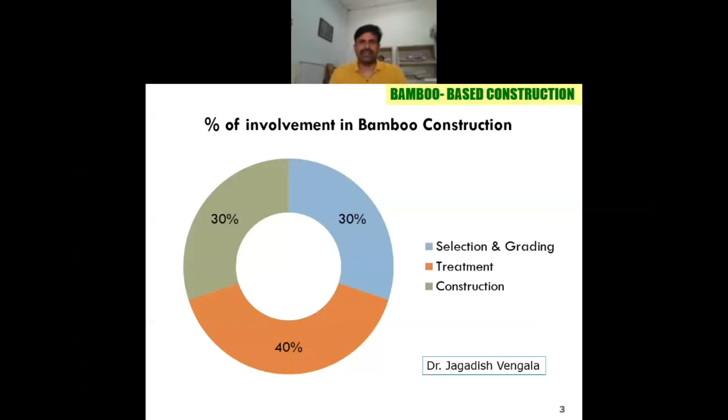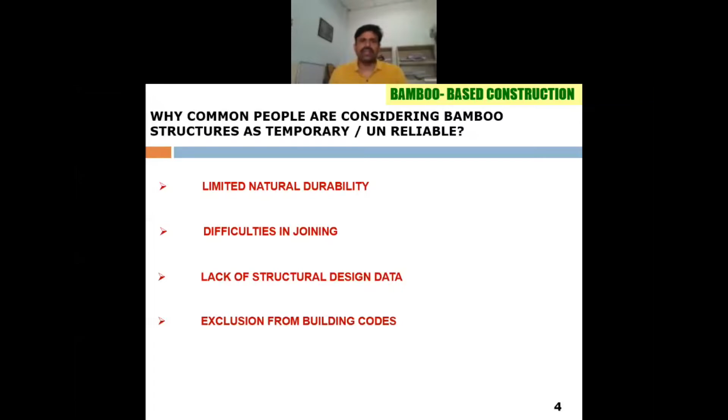In India, common people consider bamboo as temporary and unreliable due to various reasons like limited natural durability, difficulties in joining, lack of structural design data and exclusion from building codes. In 2005, the National Building Code of India included bamboo as one of the building materials, in Part 6 of Section 3B.

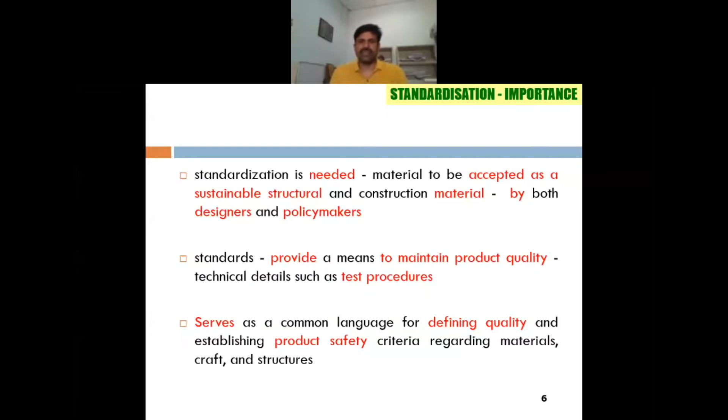So today's topic is on standardization. It is very much needed for bamboo to be accepted as a sustainable structural material, both by designers and policymakers. Standards provide a means to maintain product quality and test procedures, and also serve as a common language for defining quality and product safety. Initially we had Indian standard methods for round bamboo and split bamboo, and there was an absence of a standard building code. As I mentioned, in 2005 they included it.

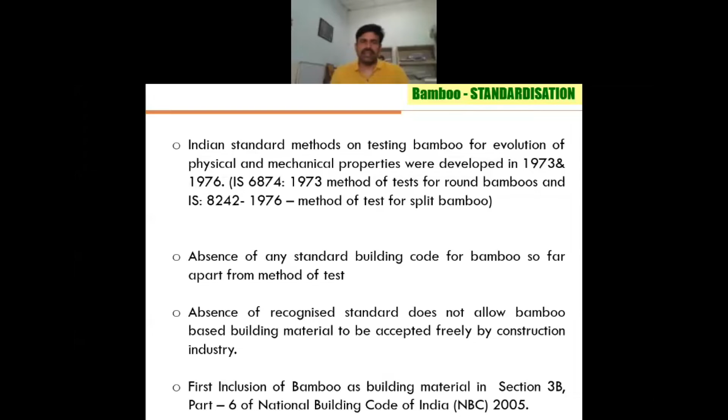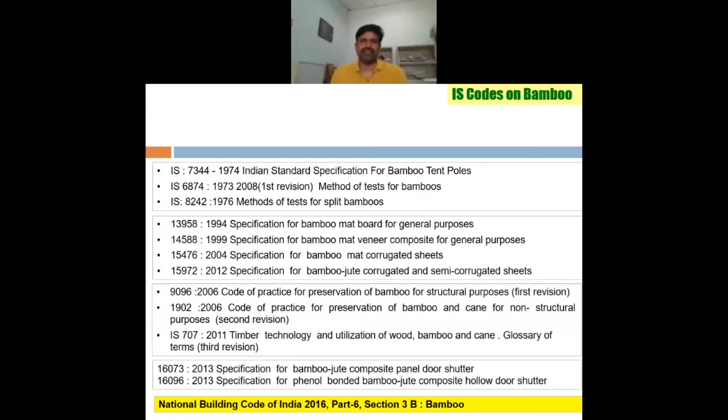So these are the standards we have: specification for bamboo tent poles, tests for round bamboos, split bamboos, and bamboo composites. We have a few standards for preservation and a general glossary of terms, and also bamboo-based door shutters, and we have the National Building Code of India. I'll touch upon each of the standards quickly.

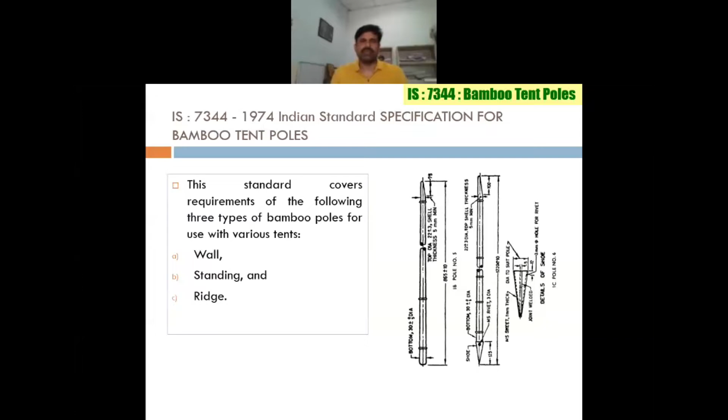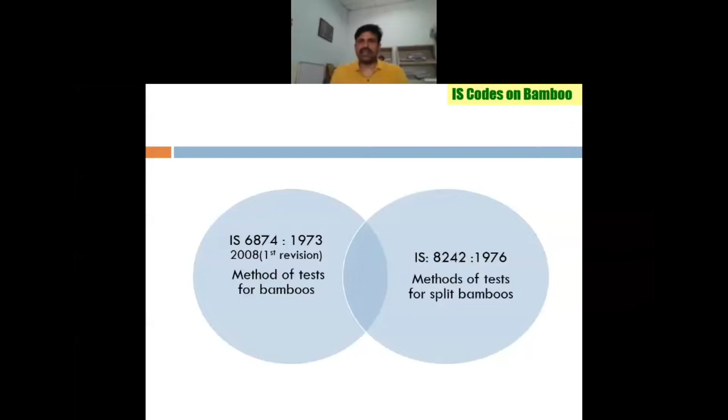So bamboo tent poles, this is IS 7344. Initially, for tents and other temporary structures, these poles were being used. The specification of these poles is included in this standard, particularly for walls, standing and ridge portions. For round bamboo and split bamboo, we have IS 6874 and 8242. This was revised once in 2008.

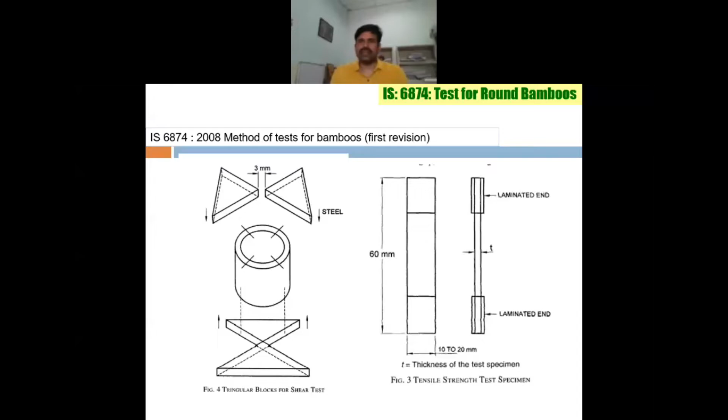Very interesting is round bamboo, how to test the bamboo, very important. We have seen in the Brazilian professor's presentation how to test the... test also included in the code. This is how you will test it.

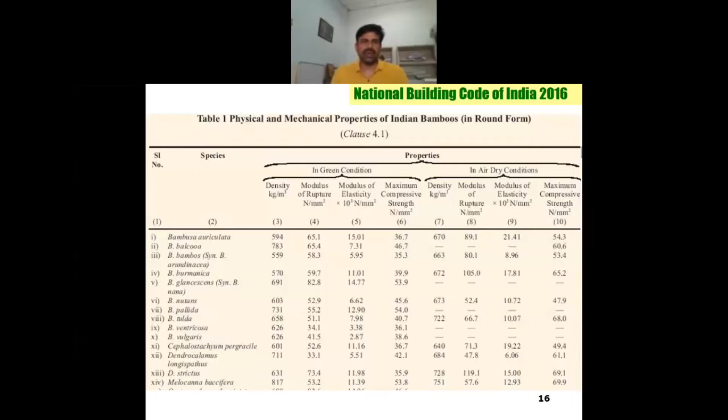So all these values were mentioned in the National Building Code of India 2016. You can see various species, one in dry condition and another in green condition. All the values were mentioned in the National Building Code of India 2016, and even the grading is done based on structural properties given in the National Building Code of India.

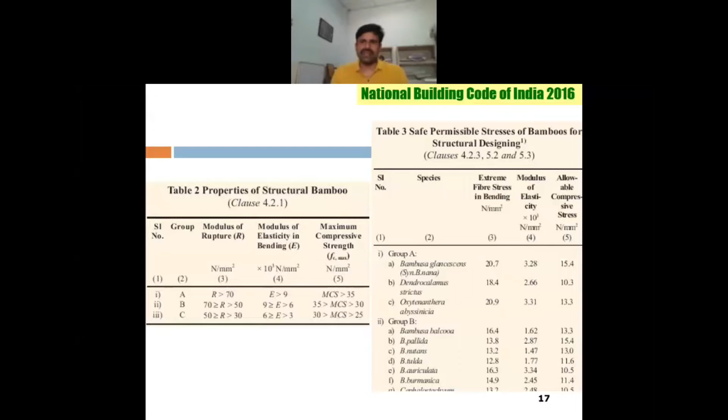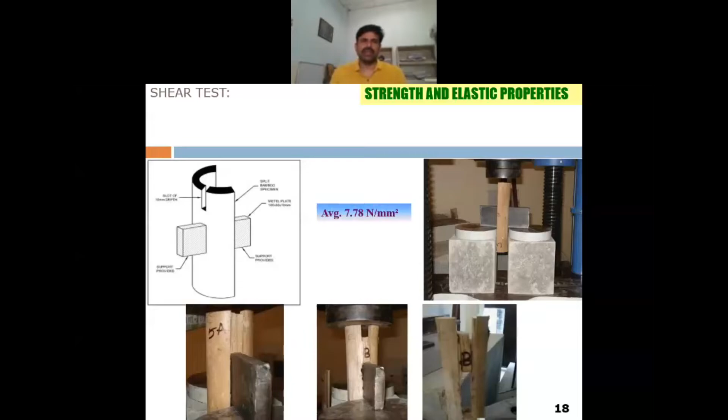A very important point I would like to mention here is shear. Generally, shear parallel to grain is tested in the code, but we have tested a typical procedure wherein we made a slit, because shear is a very important parameter in bamboo joinery. When you connect different bamboos with nuts and bolts, shear is one very important parameter. This is how this test was proposed for shear. The average value we got is here; typical ranges are from 4 to 11 MPa.

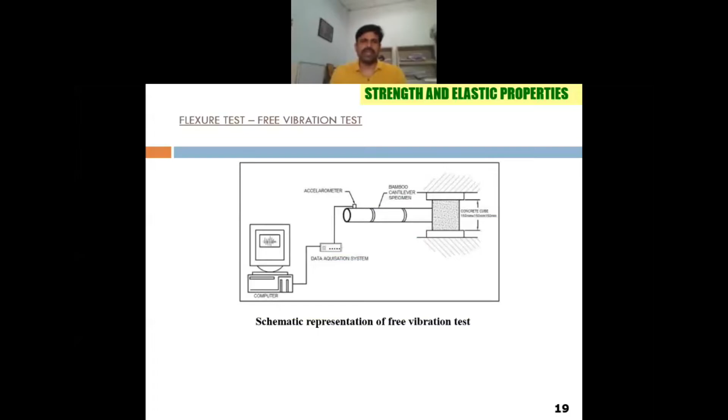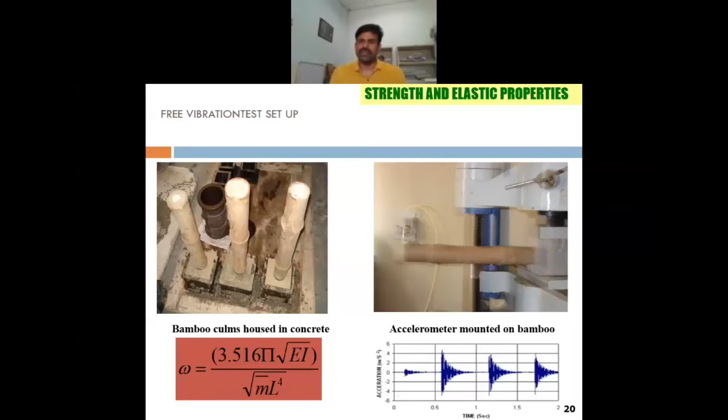One very important test procedure we have developed is a free vibration test, wherein you create fixity on one side and tap it on the other side. We mount accelerometers and measure the natural frequency. Based on that, you can measure the modulus of elasticity of the bamboo.

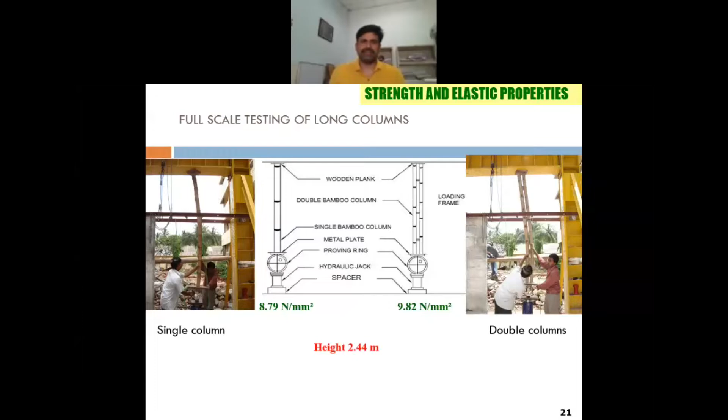When it comes to preservation, very important, as I mentioned, construction involves preservation, then grading, and then the construction. I'm coming to the second part, that is preservation. We have IS 9096 and 1902.

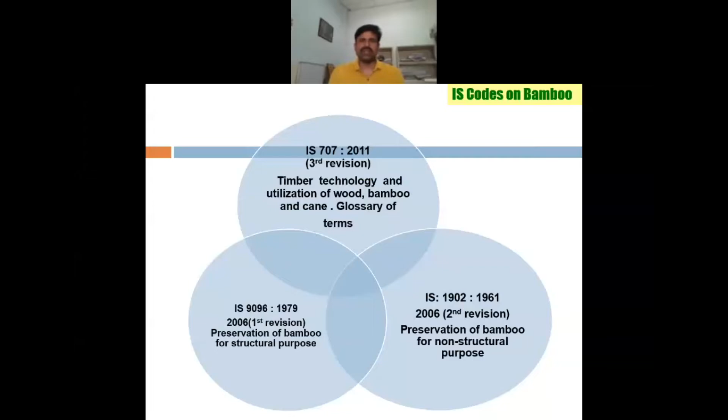One is for structural and another one for non-structural. And IS 707 gives a glossary of terms related to bamboo. So IS 707 gives you the basic definitions of bamboo clump and culm, and also some of the bamboo joinery, joints and connections.

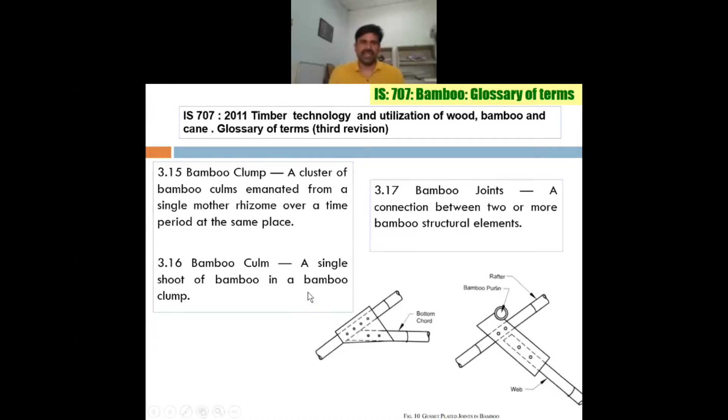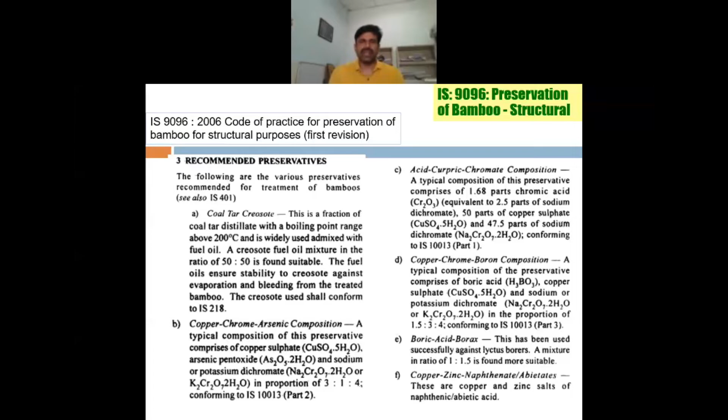When it comes to IS 9096, the various materials one can use to preserve the bamboo were given, starting from coal tar creosote to boric acid borax to copper zinc naphthenate. So various preservatives were given in this IS standard. And also how much absorption a particular pole, green bamboo or dry bamboo has to take has been given in IS 9096.

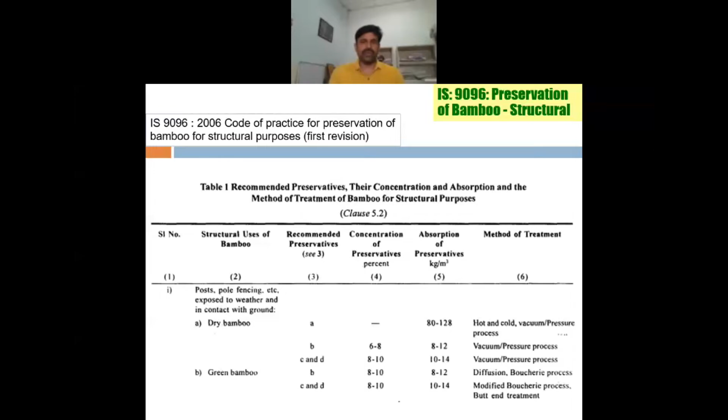And the various methods you have to follow, hot and cold, dip, diffusion or Boucherie, were given clearly in IS 9096. When it comes to the non-structural purpose of bamboo, IS 1902 gives the modified Boucherie process. And for most non-structural purposes, either you go by soaking or by applying the preservative by brush coating. So this is the difference between the structural and non-structural preservative treatment.

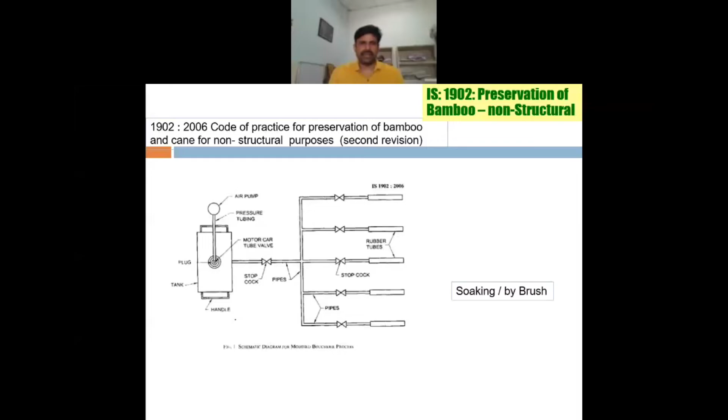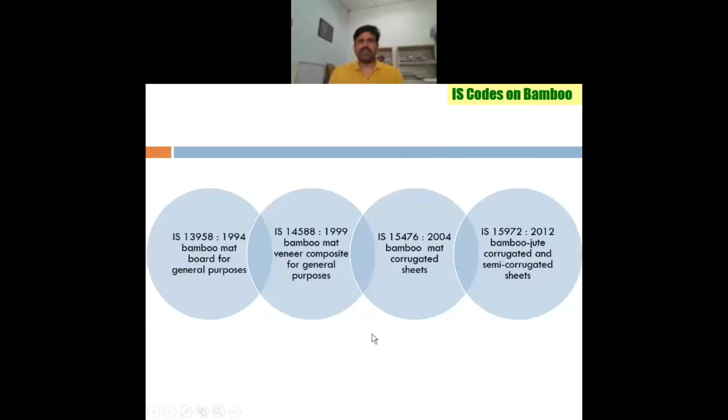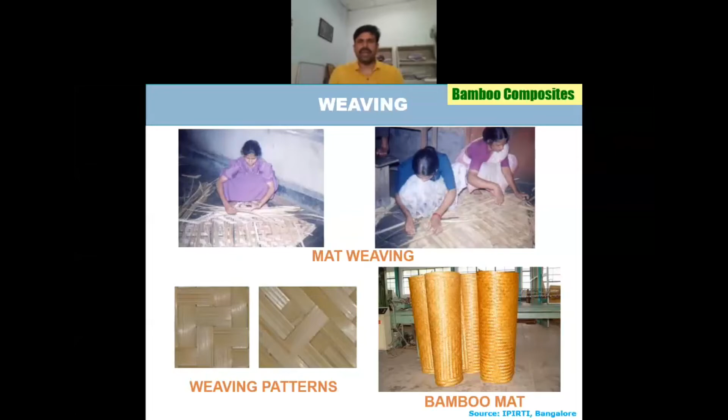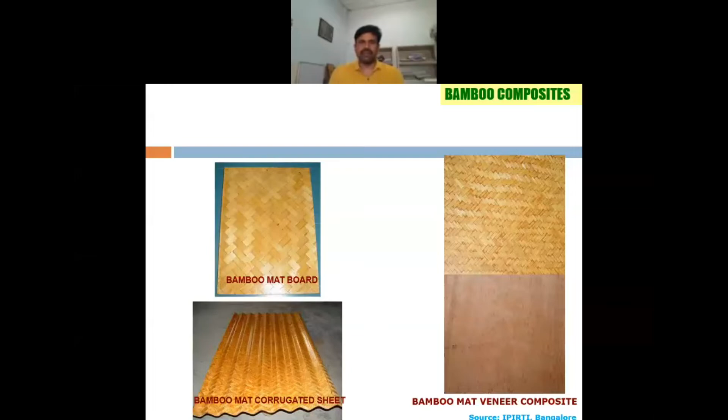When it comes to composites, IPIRTI, where I worked as a former scientist, has done a lot of work. These codes were brought in particularly for composites, from mat board to mat veneer composite to corrugated sheet to bamboo jute corrugated sheet. Typically, slivers were woven into different weaving patterns, bamboo mats were made and then dipped into resin. This was subjected to pressure and temperature in a hot press. If the die is flat, you get a flat board, and if it is a corrugated die, you get a corrugated sheet.

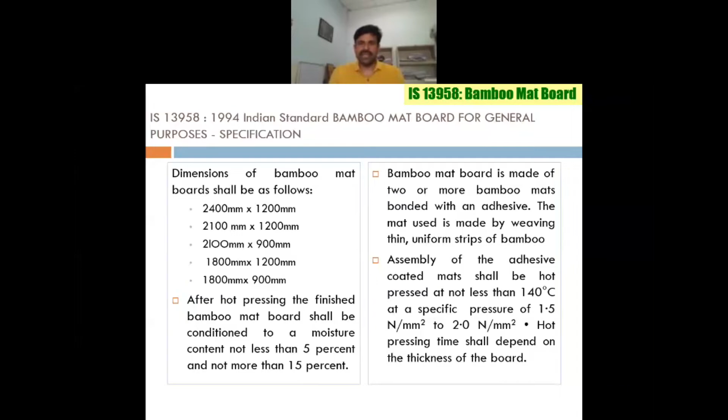Coming to the specification of the bamboo mat board, different dimensions were given, and hot pressing I have mentioned. The moisture content after hot pressing should be between 5 to 15%. The temperature you have to maintain is 140 degrees centigrade in the hot press, and the pressure is between 1.5 N/mm² to 2.0 N/mm². The time depends on the thickness of the board. These are the specifications given in the Indian standard for the bamboo mat board.

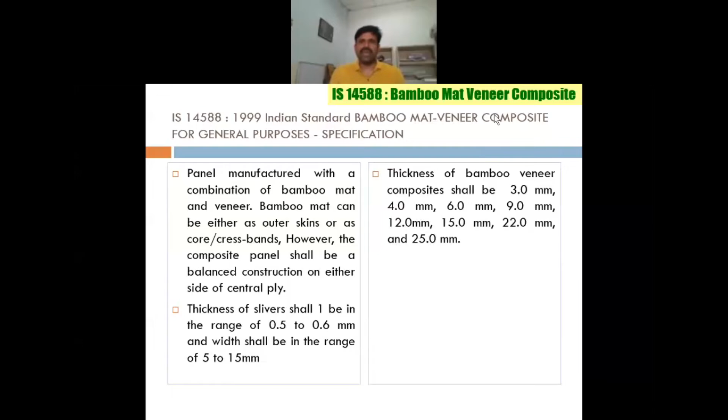When it comes to bamboo mat veneer composites, you include wood veneer in between. The sliver thickness is between 0.5 to 0.6 mm, and the width is 5 to 15 mm. You can make these veneer composite boards. Thickness varies from 3 to almost 25 mm.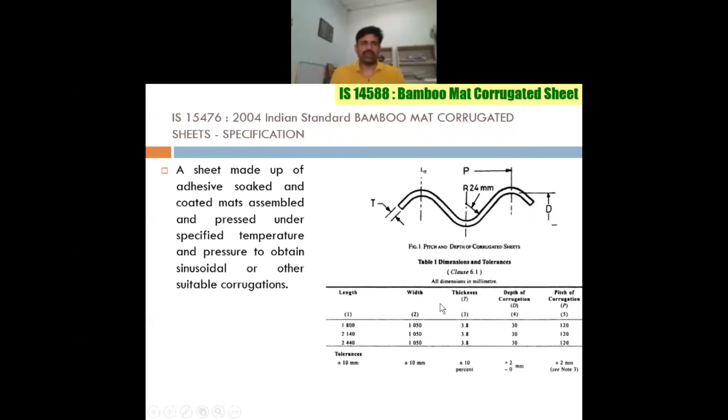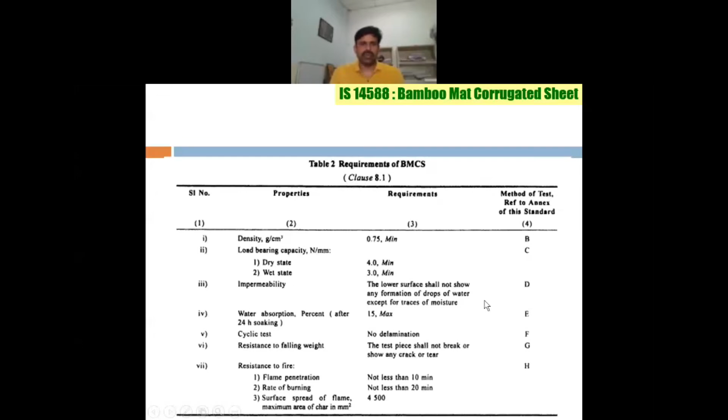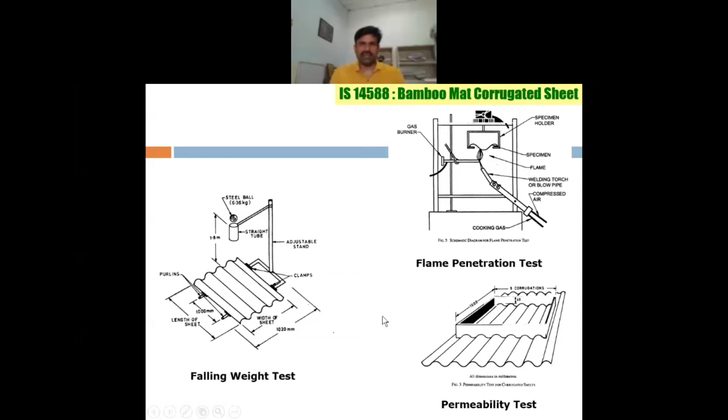For the bamboo mat corrugated sheet specification, IS 15476, you can see the different dimensions and the depth and pitch of corrugations. These were soaked and then hot pressed, as I mentioned earlier. These are the property requirements of the corrugated sheet, from density to permeability to water absorption to resistance to fire. This is the falling weight test, wherein around 0.36 kg of weight is dropped from a certain height, and also flame penetration: you give a flame and it has to withstand it. And permeability: 20 centimeter depth of water is stagnated on the roofing sheet, and we measure whether there is any dripping. These were the specifications given in the Indian standard for the bamboo mat corrugated sheet.

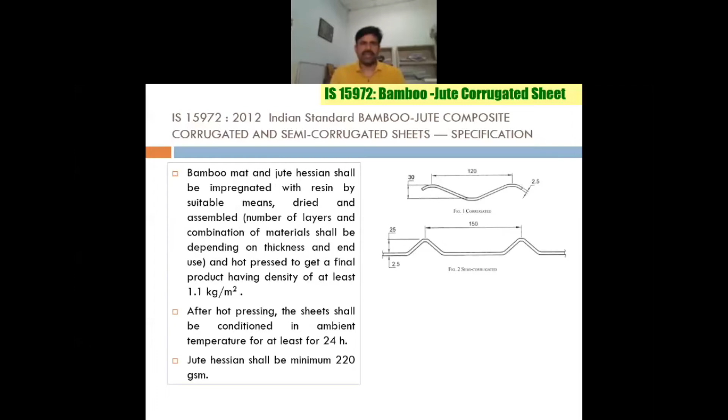Coming to the bamboo jute composite corrugated sheet, you have two types, corrugated and semi-corrugated, and the dimensions were given in IS 15972. The jute you incorporate should have a minimum of 220 GSM, that is the minimum thickness of the jute. These were the requirements of the bamboo jute composite as per the Indian standard.

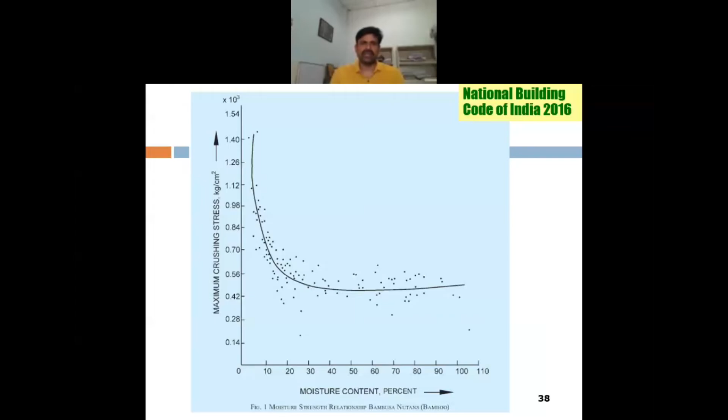Coming to the National Building Code of India 2016, a relation between moisture content and crushing stress was given. You have to season the bamboo to a moisture content of 20% or less, which gives the required strength to the bamboo. Freshly cut bamboo has a lot of moisture, like 60 to 70%. So you have to season it and bring down the moisture content to less than 20%.

The National Building Code of India also gives information about various truss patterns, one with gusset plate, nuts and bolts, and also the regular pin-ended joint trusses. It is very interesting to note that when you compare the solid bamboo pin with the mild steel bolt connecting these members, the solid bamboo pin has 56% of the strength of the mild steel bolt.

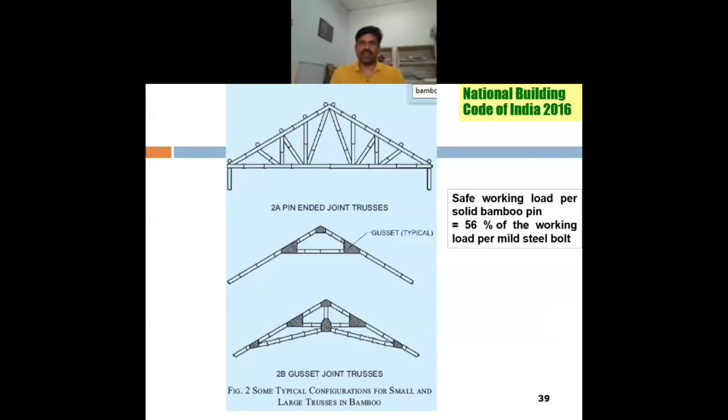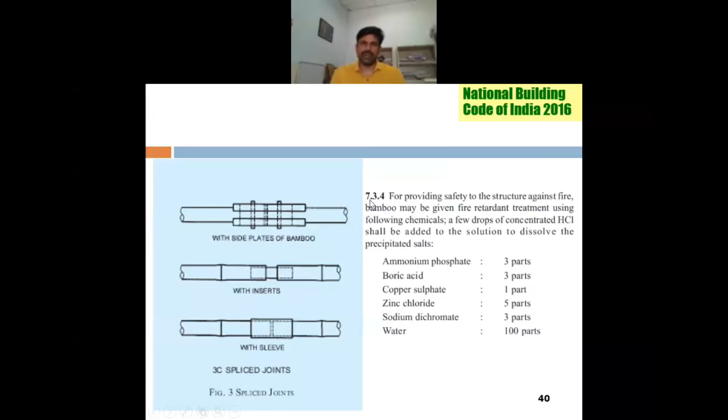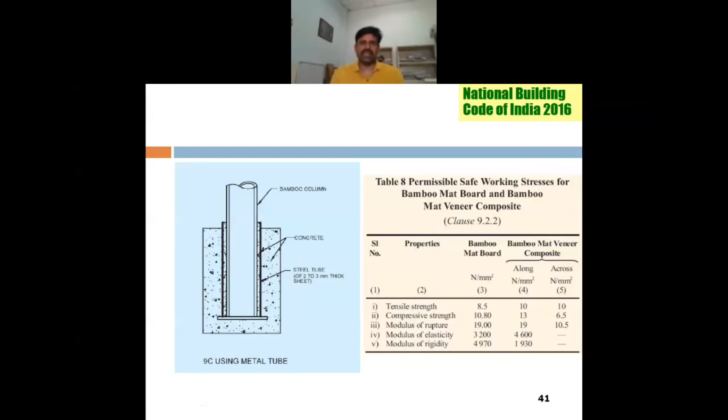This was the information given in the National Building Code of India. Various joinery methods were given, along with treatment details and the chemicals to be used. Also, the safe working stress of bamboo mat board and mat veneer composites was given, and how to protect the bamboo from concrete using steel tubes.

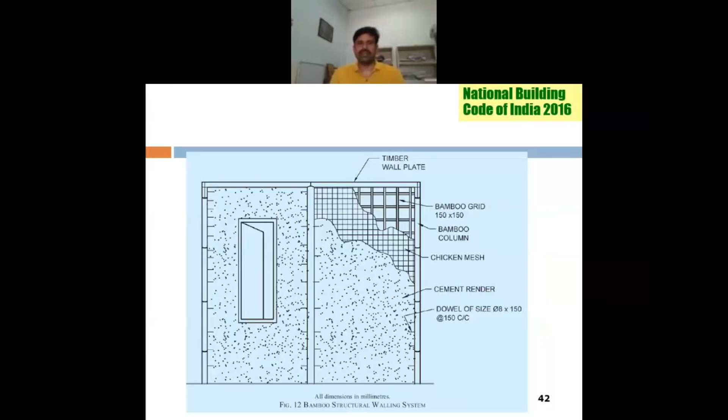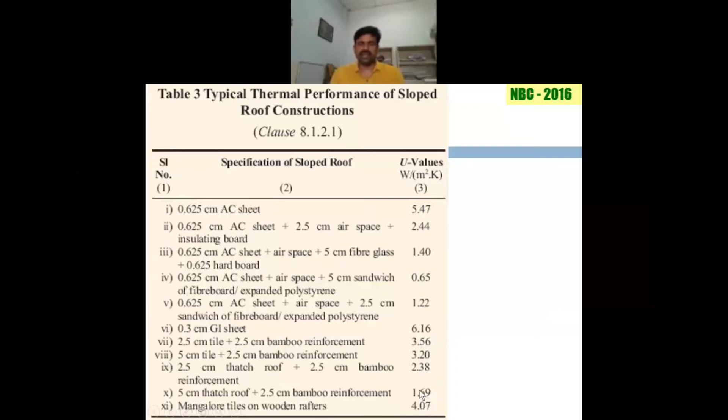This was the typical wall structure included in the National Building Code of India, a cement mortar based structural walling system, with bamboo as reinforcement and tiles. The thermal comfort inside the building is improved when you use bamboo as reinforcement or a thatch roof. You can see the difference between an AC sheet and a thatch roof with bamboo reinforcement, 5.47 to 1.69, clearly showing the difference in U values for thermal comfort.

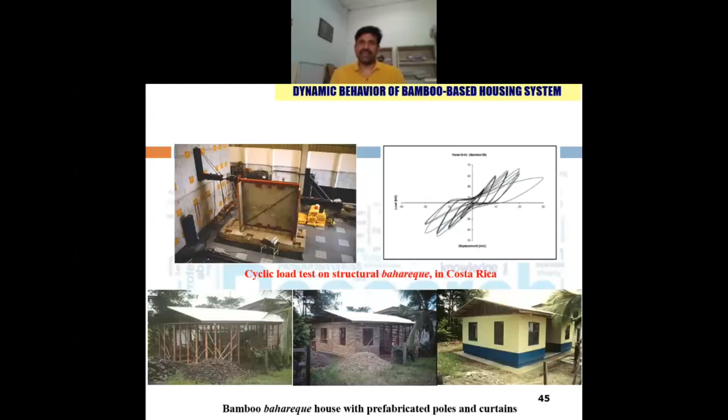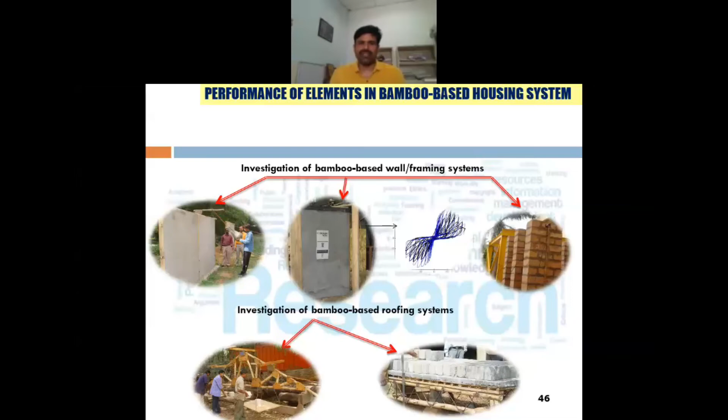Having understood the codes, some important work relates to the performance of the elements. Element testing is very important, including cyclic load tests, which must be carried out whenever going for a different wall structure. As part of thesis work, we have conducted various element-based testings, particularly wall framing, trusses, cyclic load tests, and so on.

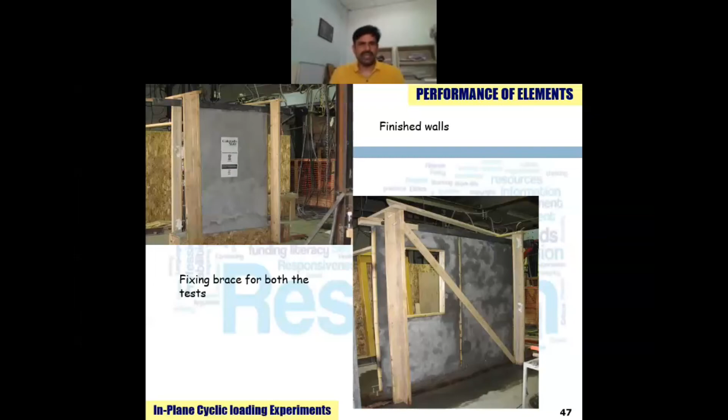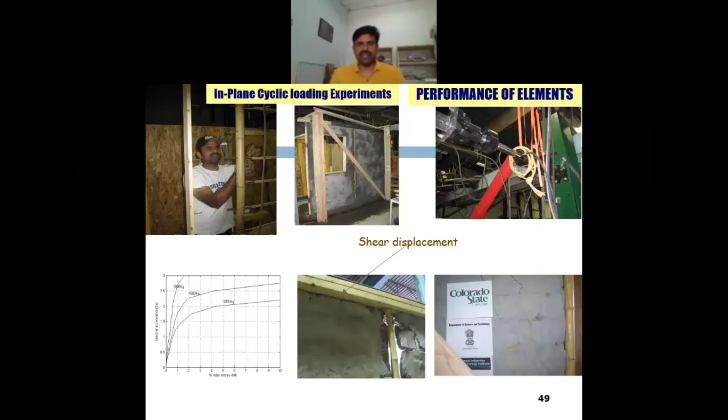This was part of my fellowship. I carried out cyclic load tests on wall elements at Colorado State University, USA. We used an actuator and conducted in-plane cyclic load experiments, wherein the shear displacement and drift were within limits when we numerically modeled the house.

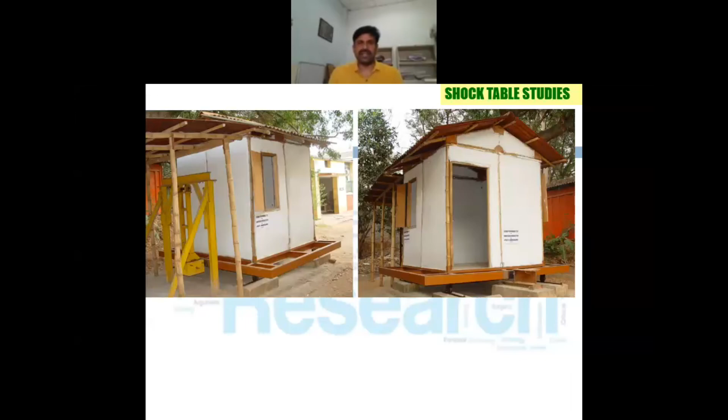The seismic performance of the house was then studied as part of my thesis. I worked on seismic performance, where the building model was tested on a shock table, with a pendulum hitting the table. The fundamental natural frequency of the house is around 13 hertz. We made the table such that its fundamental natural frequency was 130, ten times more than that of the building. The tests were then carried out on the building.

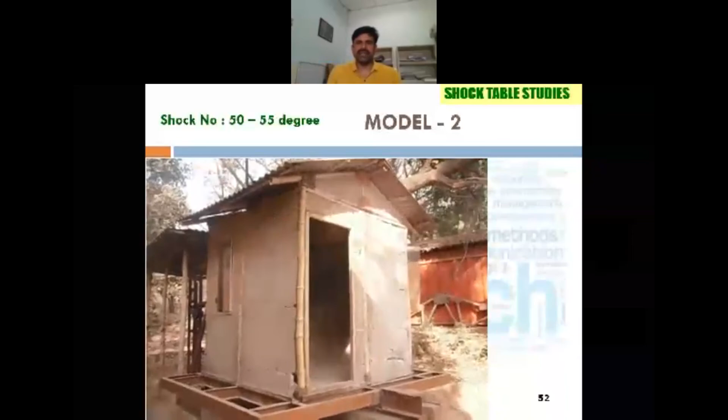I would like to show you a typical video of the test being carried out. The pendulum hits the table, and we keep measuring the crack progress and so on. This was the crack pattern we observed after the impacts.

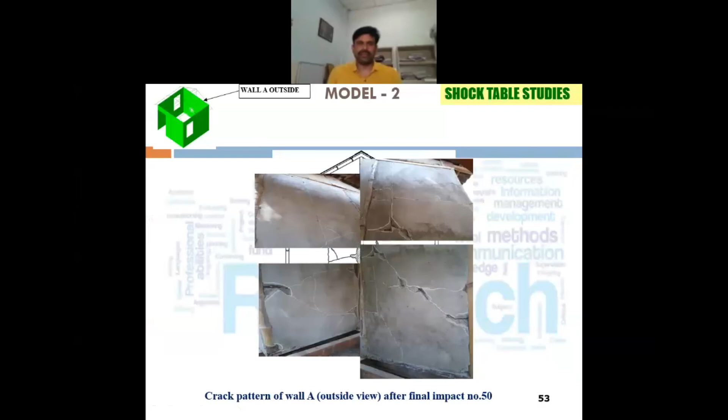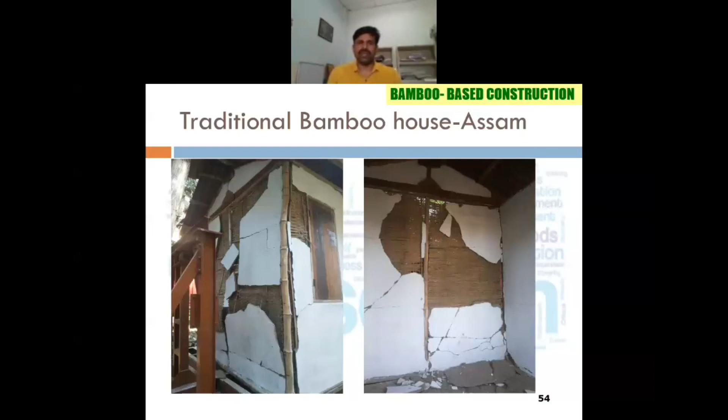Some traditional houses were also tested on the shock table, where we could observe the problems, and then suggested recommendations on where to improve and which areas need improvement. This is very important when testing full scale models, particularly in bamboo reinforced structures.

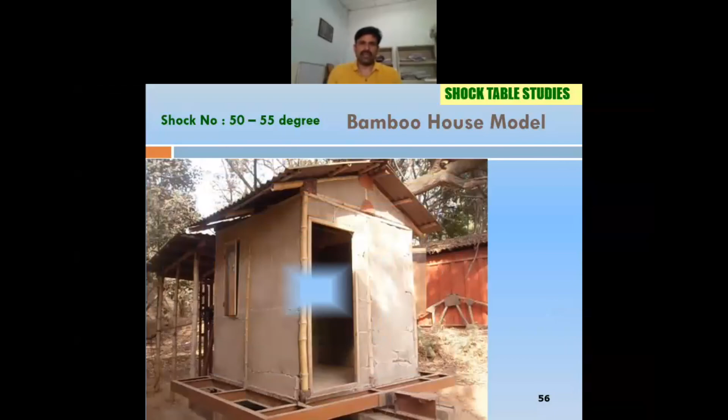This was the shock table test, which I have already shown. This is the twisting of the house model you can see after the test. So this is also very important.

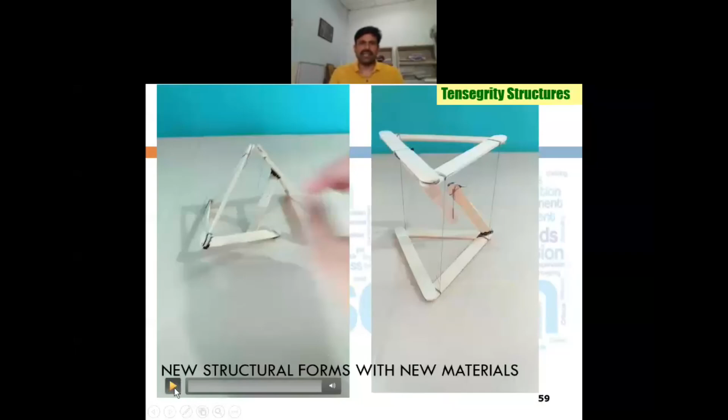New forms are coming up, and these are to be incorporated into standards. Particularly, this is one student work I carried out on tensegrity structures, the foldable structures, where one has to work. This is a basic model, and based on this small model, we have numerically modeled a typical table.

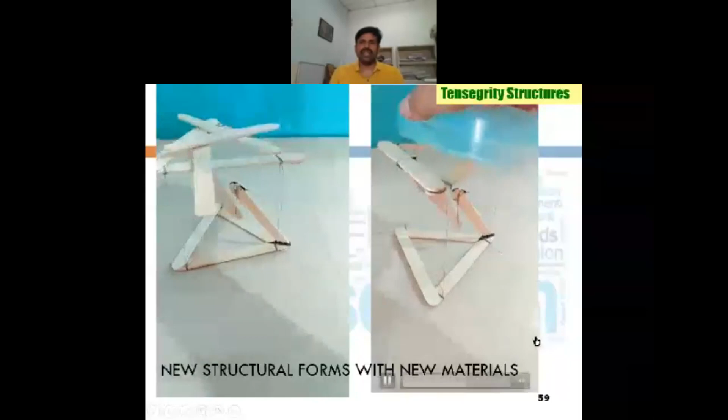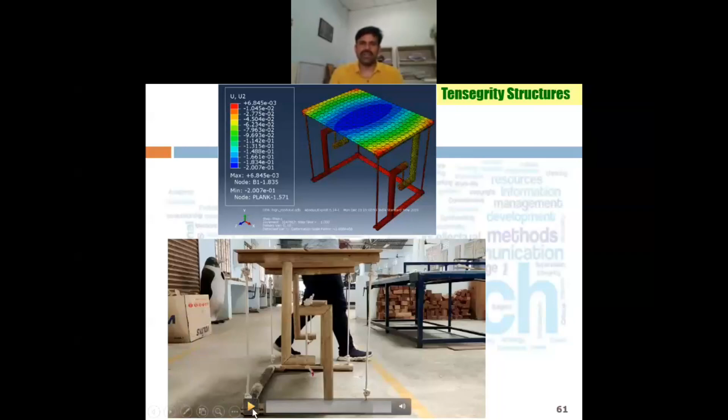You can see the tensegrity structure. This was initially modeled in Abaqus, and then we understood its properties. This particular table can be extended to a bigger structure like pergolas and other structures. You can see the view of this particular tensegrity structure.

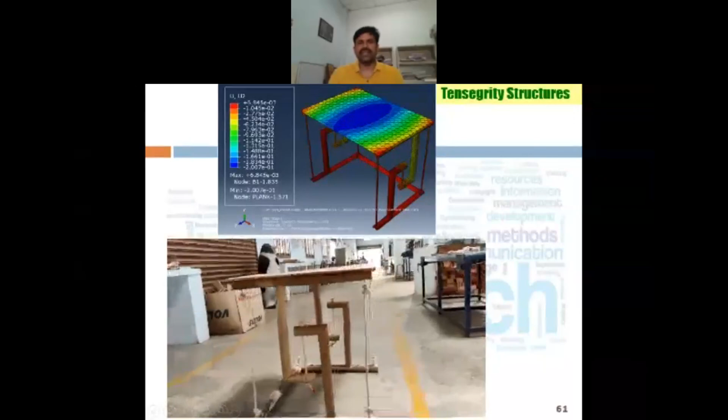With reinforced concrete, we always have a doubt: bamboo versus concrete, is it a love or hate relationship? One has to understand this. Some information is given in the bamboo National Building Code of India, particularly the strength characteristics between mild steel, bamboo, and concrete. These values have to be upgraded because of the improving quality of bamboo we are getting, and the increasing quality of concrete.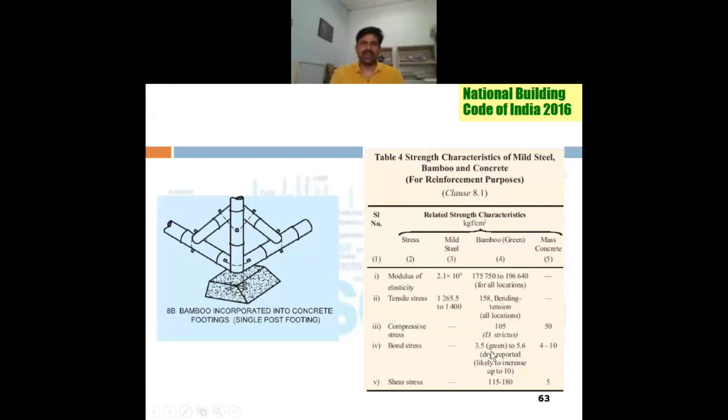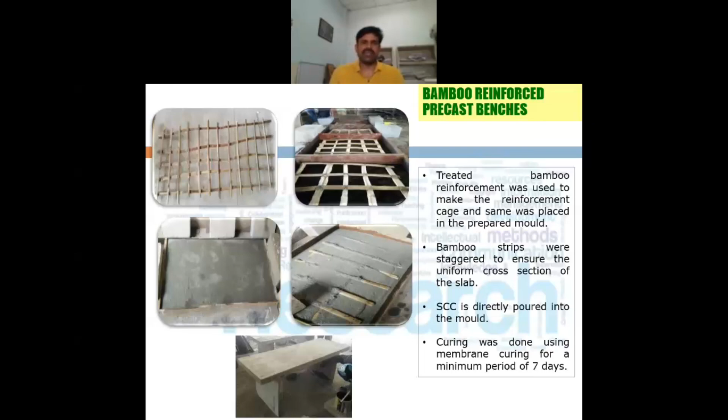This work is very important, particularly when pouring concrete for reinforced bamboo structures. When you vibrate it, the entire skeleton of the bamboo gets disturbed. Self-compacting concrete is one such solution, allowing you to pour concrete for bamboo reinforced concrete structures. We have also made a park bench using bamboo as reinforcement.

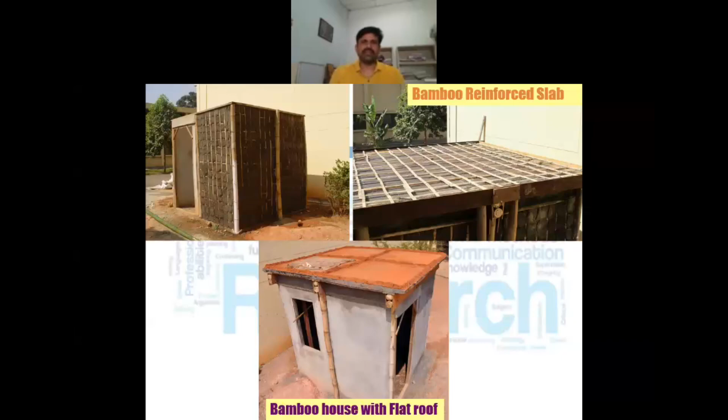Also, with flat roof applications, one can use bamboo as reinforcement. You need to understand the behavior of the structure. So with that, thank you.

This was one of the recent structures I have mentored, part of the work in Goa. Thank you.